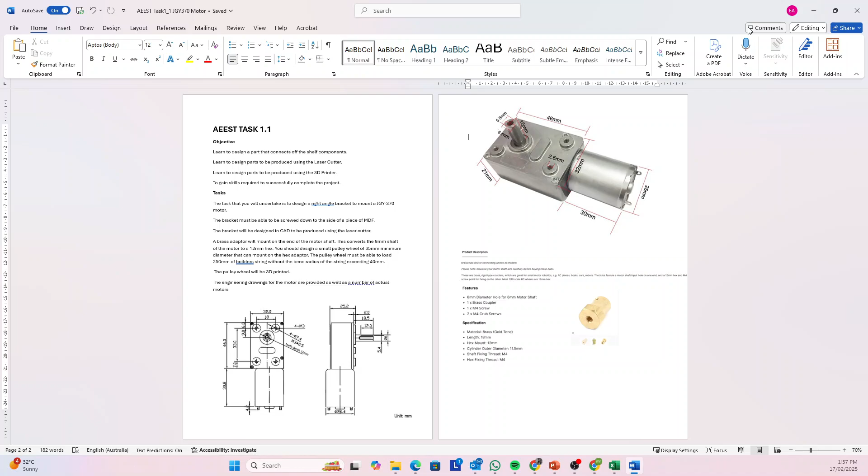So what we're going to do is we're going to start a new design. So we're going to start a new document. I'm going to call it JGY370 demonstration. Going to create.

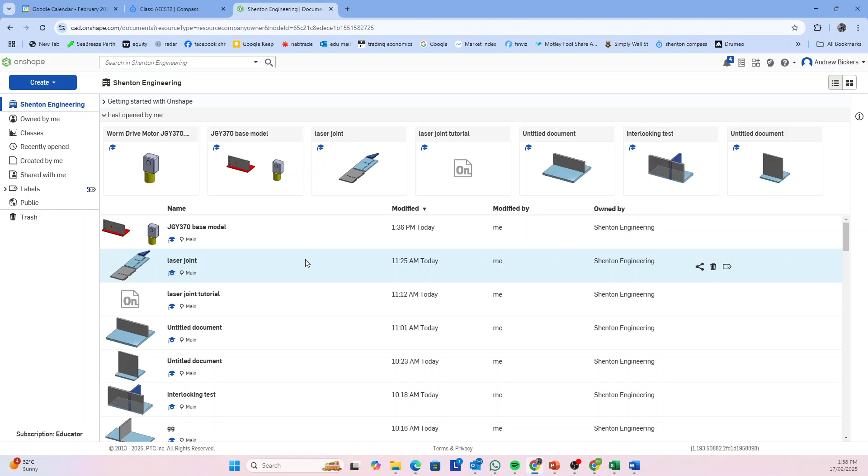Now, while I'm doing this, you're going to have to bear with me because it's quite complicated and there's quite a lot of things in here. So if I stop and start again or have to go back or make mistakes, that's okay. You're going to make plenty of mistakes while you're making it, I'm sure.

Okay, now, first thing we're going to do is we're going to import a model, a previously prepared model of the motor so we can make sure that everything fits. So we're going to add a new tab here. That could be a part studio or an assembly, but we're going to choose import. And then you're going to go to wherever you're storing the stuff. This

design will be in the learning task. You'll just download it. This is the file. It's called Worm Drive Motor JGY370 exported SLDPRT. SLDPRT is a SolidWorks file.

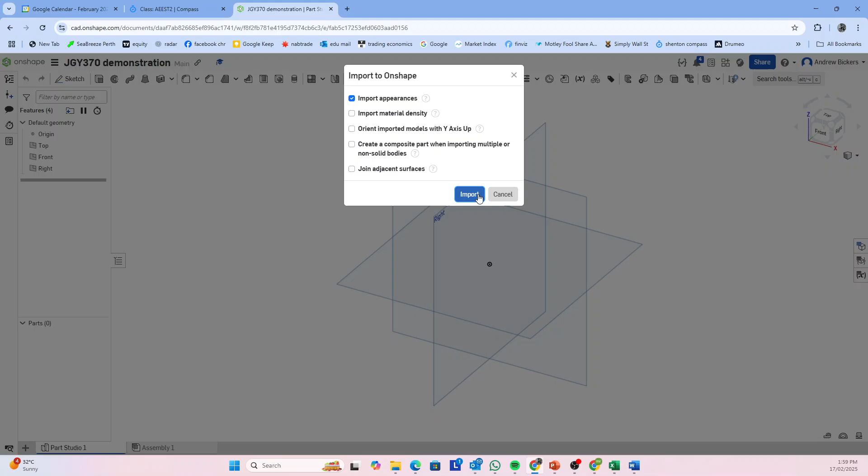All right, so this is quite good. It imports all the appearance and everything from the SolidWorks file. SolidWorks is another CAD program you might possibly use if you do engineering at university.

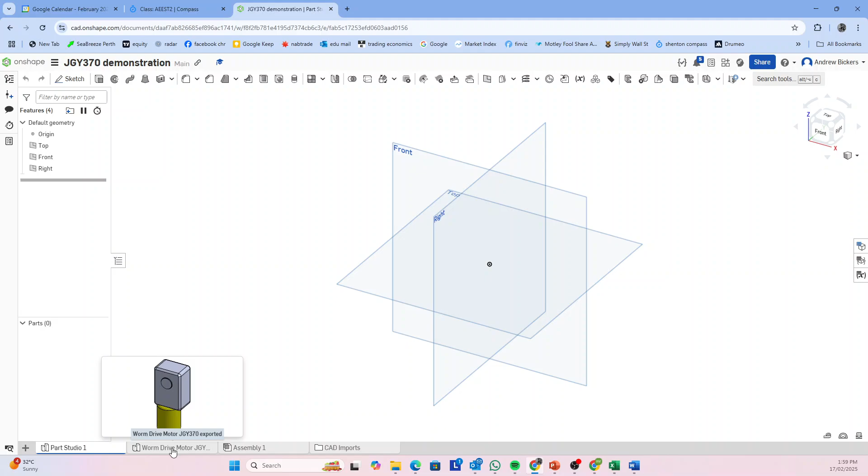Okay, so now we can close this window. We can see a new window has appeared for CAD imports. That's because we've imported that from CAD. But here is the actual part studio. See, it's got the symbol for a part studio here with the actual motor in.

So that's very useful because I just found this off the internet. I just searched for it and downloaded the 3D model for it. That's very handy because we can use this in our design to make sure everything fits.

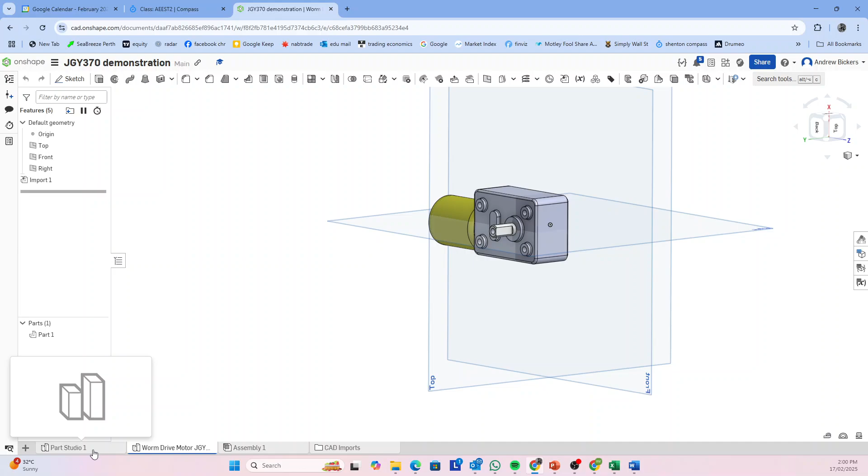Okay, now we go back to our original part studio. Also note that I've got my laser joint and auto layout already installed here. Now I'm going to make a sketch. Like I say, the idea is for you to get the dimensions and design this yourself. I'm just giving you an idea of how to do it here.

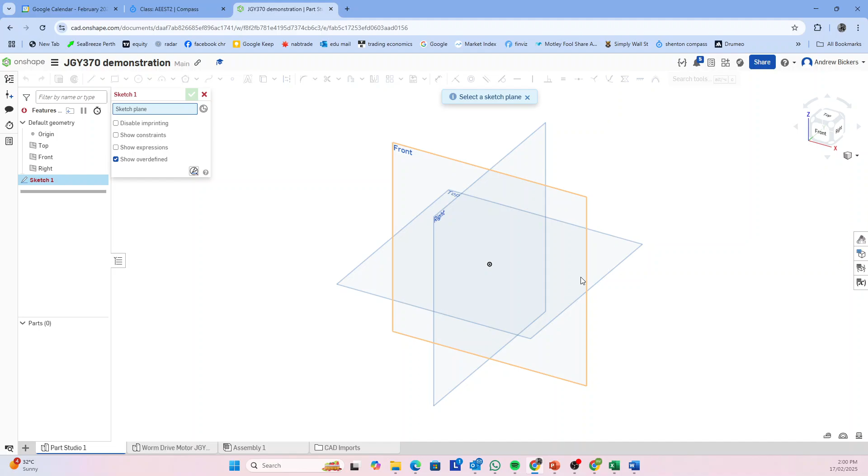So I'm going to create a sketch. I'm going to put it on the top plane here. Start a rectangle. I'll make this dimension here. Might make it 90. Enter, and I'll make that one 60. Enter. Okay, dimensions are on there, so it's all black, so that's good. Go like that. Turn that off.

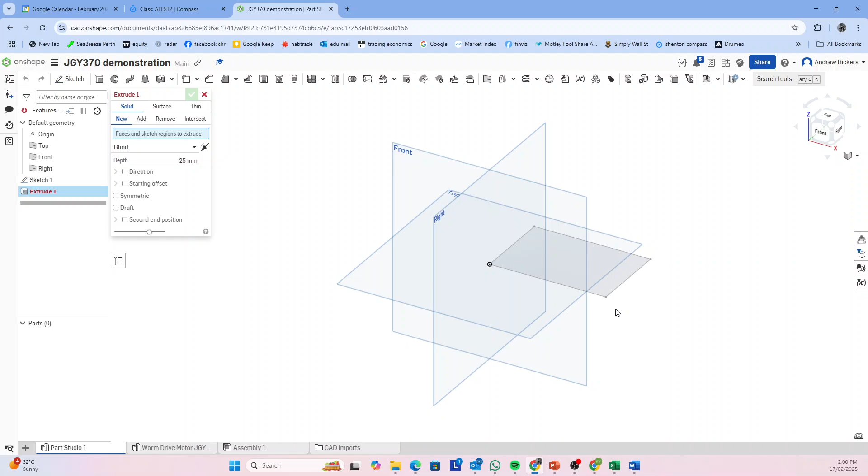Now I'm going to extrude that by 3 millimeters because the material we're going to be using is 3 millimeters thick. All right, and then just like when you went through, oh, I must have not accepted that. Let's accept that again. So 3 millimeters. And then obviously it's important you click that button before you do anything.

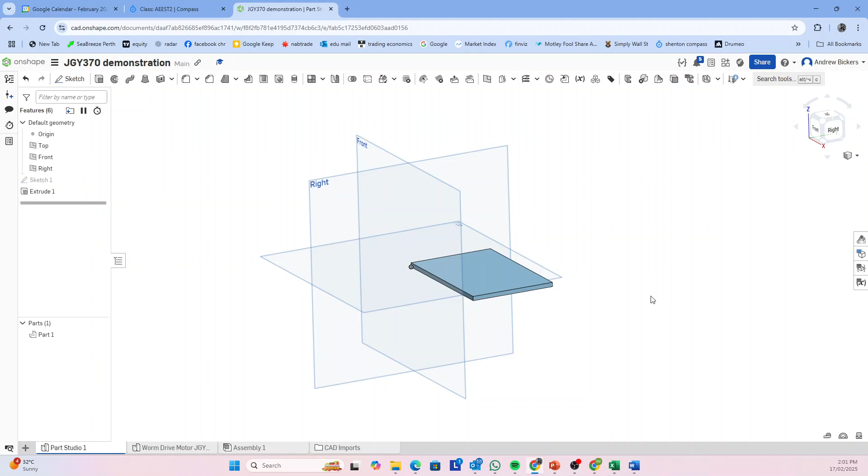Just like we're going to make this a finger jointed structure. All right, so if we're going to make it a finger jointed structure using the laser joint, you have to have done the laser joint tutorial first, otherwise you might get a bit confused. We have to make our parts overlap. So when I make my upright part that the motor is going to mount on, we're going to make a right angle bracket now.

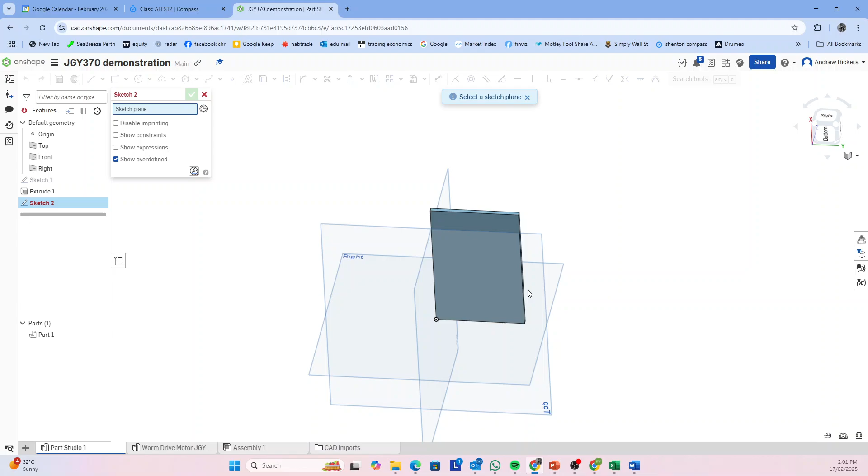I'm going to hit sketch, and I'm going to sketch on the bottom of this. Okay, here I'm going to grab my corner rectangle. You see how it's snapped to the extents of the original rectangle, the original sketch.

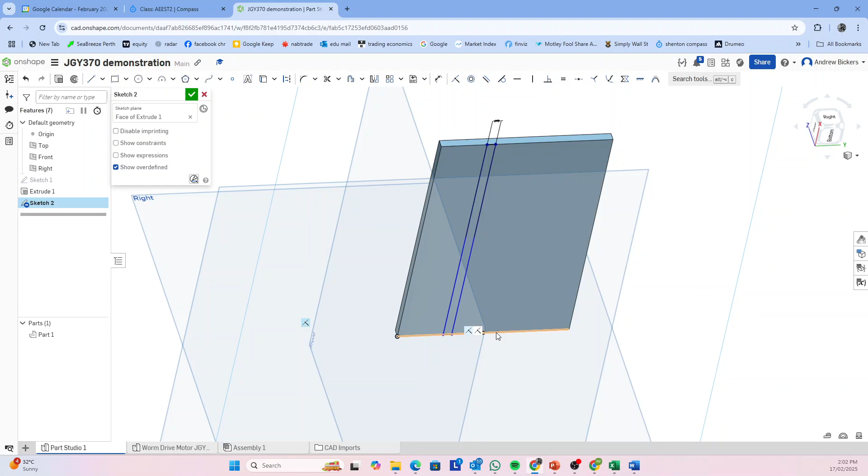Now I'm going to make that 3, enter, and then escape, and then escape out. Yes, escape out, because I don't want to give this line a dimension because it already knows it's snapped to here. So if I give it a dimension, it's going to get confused and be over constrained.

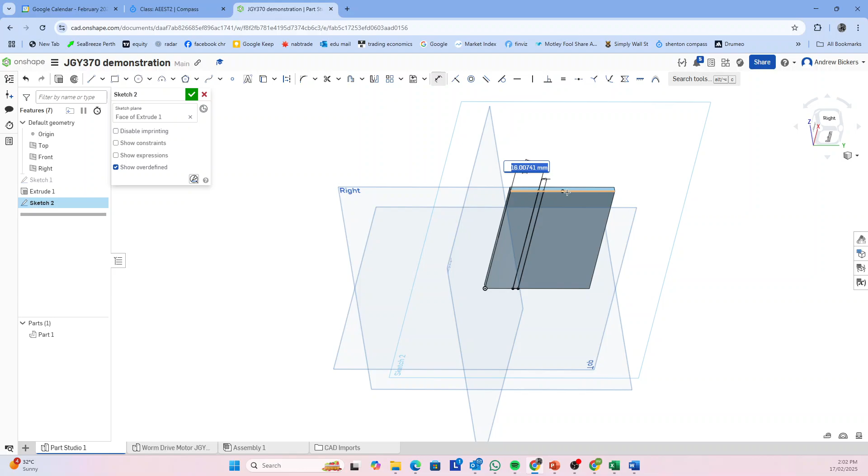So I've got 3 millimeters here though, but the lines are still blue. It's because they don't know how far from the edge they're meant to be. So I'm going to go in here and I'm going to dimension them from the edge by, let's say, 15 millimeters. Okay, so now

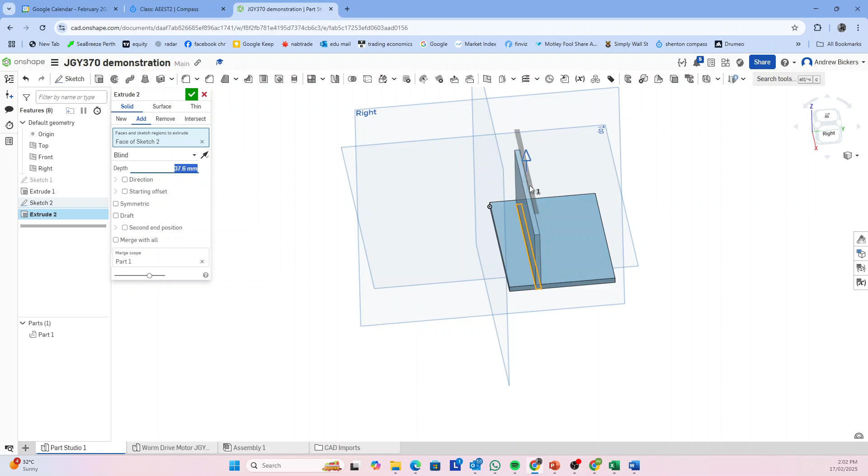I'll finish my sketch, and then I'll be able to extrude up by clicking on this part, extrude up. Now the thickness, I want it 40 millimeters high, but the thickness of the material is 3 millimeters, so I'm going to make that 43.

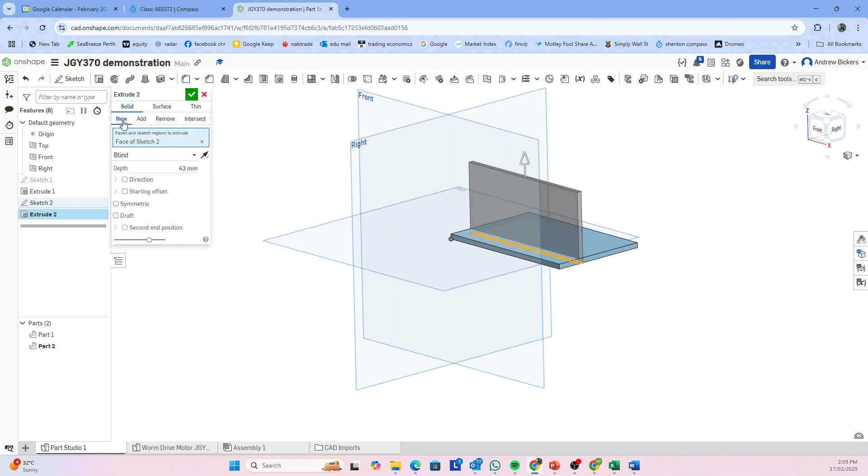Now that's not very helpful because it's all one part, you see? They're all the same color, it's all one part. We can't do our laser jointing if it's all one part, and we can't laser cut a shape like this either. So what we're going to do is go back into the extrude and make it new. In my extrusion I actually made a new part, and you can see there's two intersecting parts there. Now that's quite good.

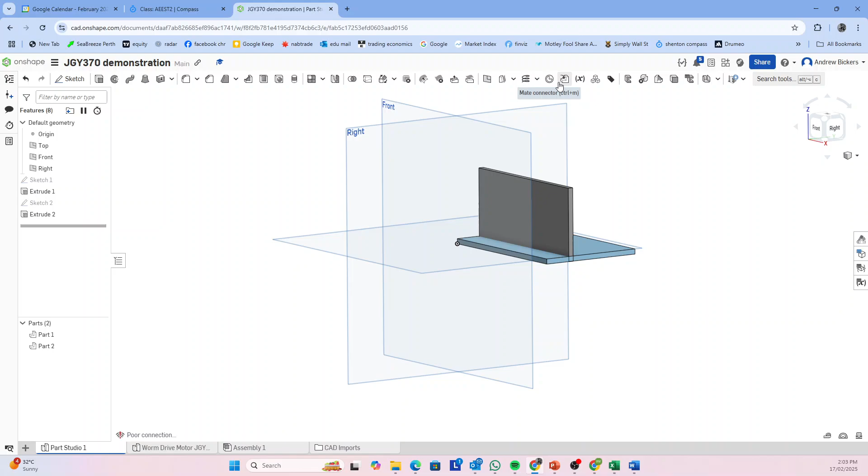So let's bring our motor in. The way we do that is we use the derived tool. Derived just means it comes from somewhere else. So I'm going to hit the derived tool.

It's going to say select the part studio. Whether it's in this document or other documents doesn't matter, you can still drag that part in from there. So I'm going to hit here. Now it's showing me where it's going to come, and I'm just going to put it in there, and we'll sort it out in a minute where it goes to.

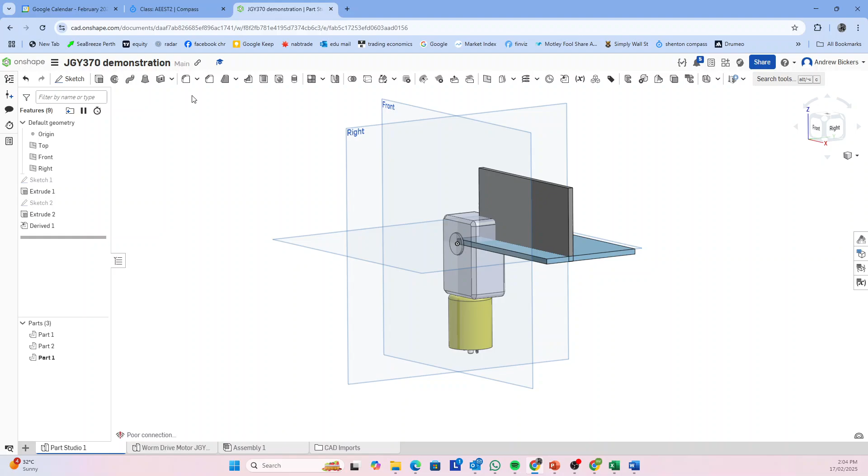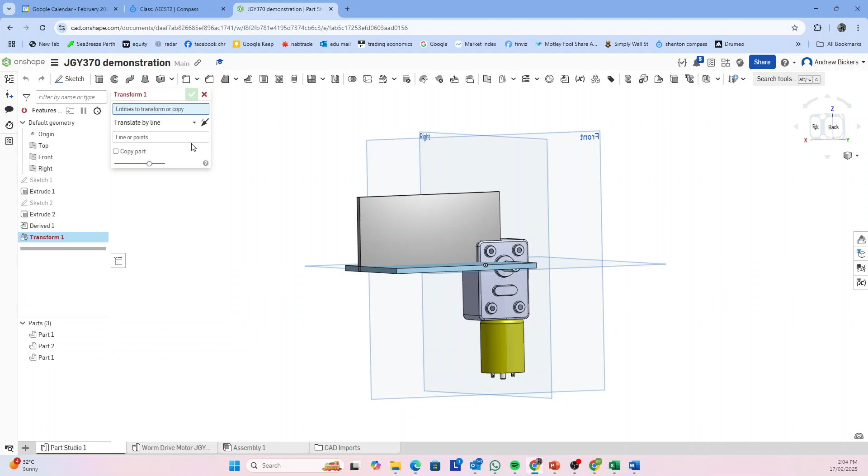Now we're going to move it exactly onto here. But first I'm going to get it just in the right orientation - I always find it's easier just to do that. So I'm going to go to the transform tool, which is this one. Click on the transform tool, and say rotate. I'm going to click on this part - see, now it's got part 1 here. That's part 1, and you've got to pick an axis.

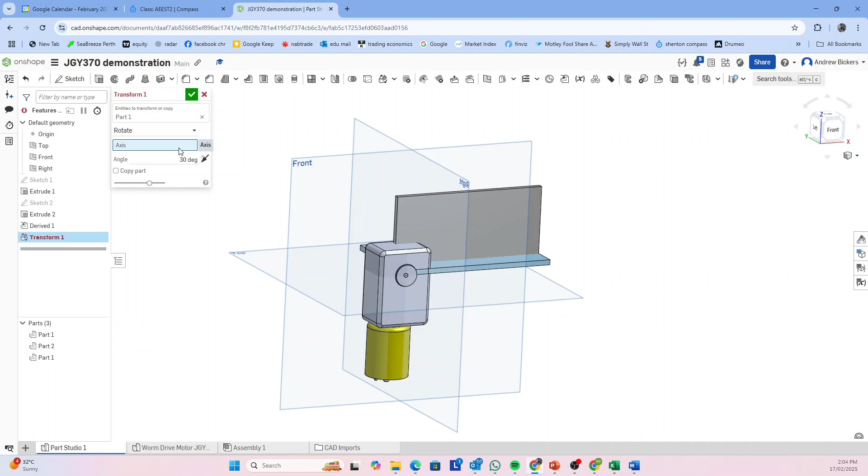So the first thing I want to do is rotate it. I'm going to pick an axis, this axis, and rotate it around here by, well, it's going to be 90 degrees, isn't it? Okay, so now it's rotated like that, and now it's facing the wrong way.

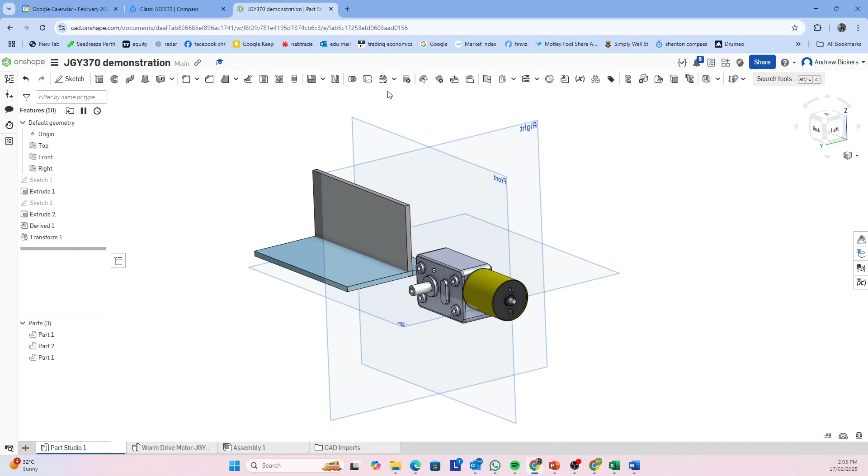I want it to be mounted the other way on the bracket, so I'm going to do another transform. But I've lost the transform tool. Here we go, so I'm going to click on it again.

And I'm going to rotate it again, but this time I'm going to choose this axis, and I'm going to rotate it by 180 degrees. Type it in.

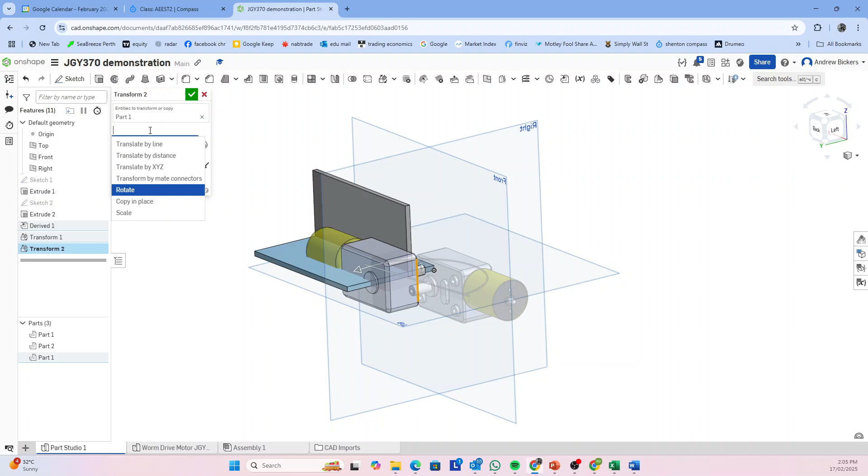Okay, and now it's kind of in an annoying place, so I'm going to translate by X, Y, Z, and then I can drag it out here, and I'm going to go okay. All right, so now it's out the way.

Oh, I need to rotate it again. I want it to face the other way, so let's rotate it again. Transform by rotate, pick the axis - this time it's that axis. 180. Now you can see this is red here, it doesn't know what to do, so we're going to pick out - I'll do that again. Transform this part by rotate by axis by that, and I'll make that 180.

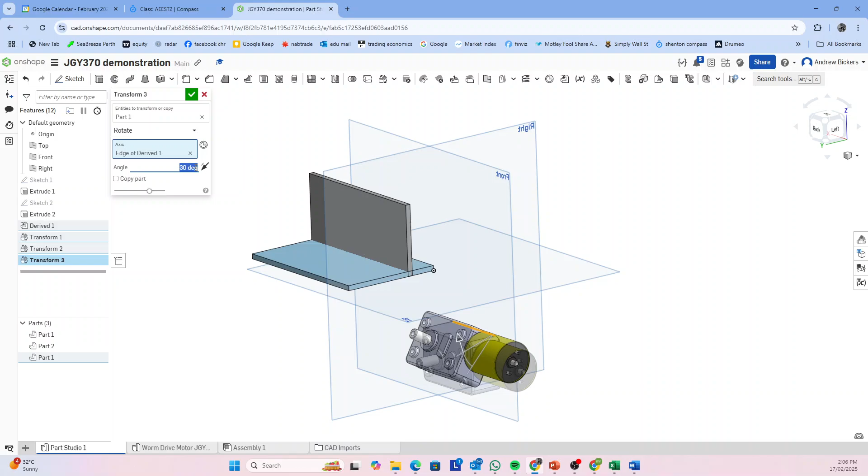All right, so now eventually we're going to line this up with here, but the first thing I need to do is decide where the motor's going to go and how I'm going to line it up. Now obviously if this shaft is going to stick through here, we're going to need a hole, so I'm going to put a hole in there.

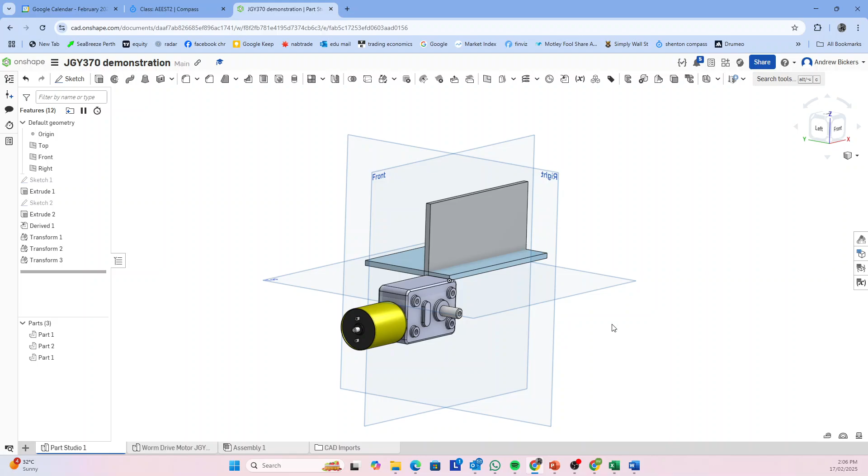So I'll do another sketch on here - a new sketch and put it on here. Go to the front because that's the way we're looking. And now I'm going to put a circle in there. I'm going to make that circle 8 millimeters in diameter. Okay, now it's blue because it doesn't really know where it is.

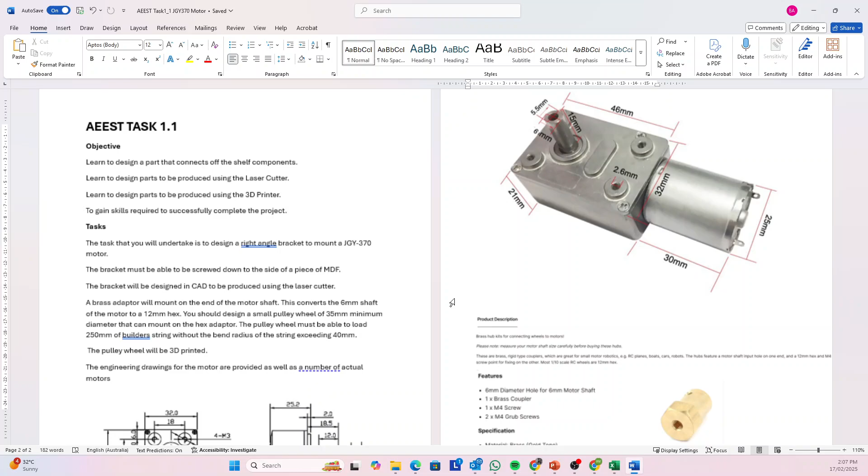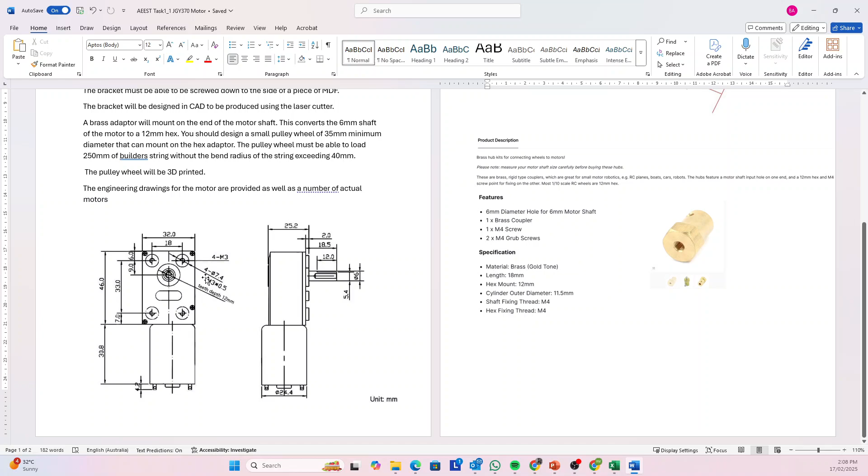Now the motor's going to sit here, so we need to do some calculations with the drawing here. In terms of height, if it's 32 across there and I want a millimeter underneath the motor, then I'm going to need the hole to be off the base. I need it to be 16, 17, 18 millimeters off the base. So I'm going to put in a dimension between here and here, and make that 18.

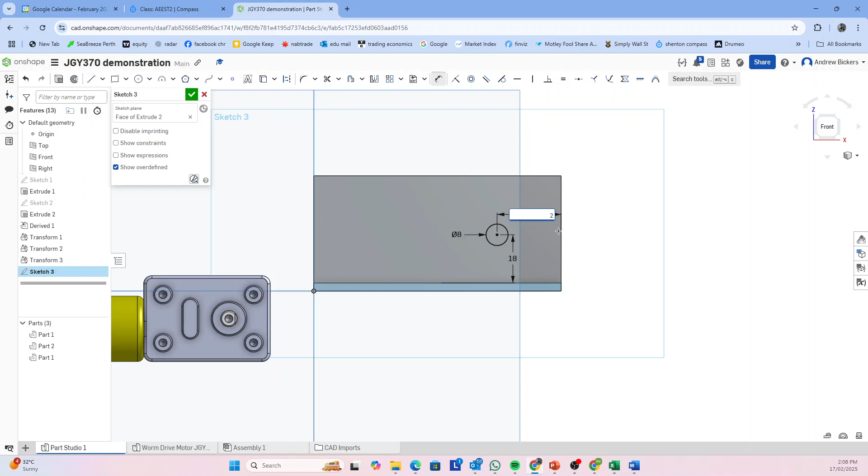And then I actually want it to be about 20 from the end. So I need to put another dimension in because it still doesn't really know where it is. I'll put another dimension in from here - I'm going to make that 20. No, actually, I'm going to make it 25. You'll see why. Like I say, this is up to you to work out the dimensions from the drawing.

Now I've finished my sketch. I'm going to push a hole in here. Make that 3 millimeters.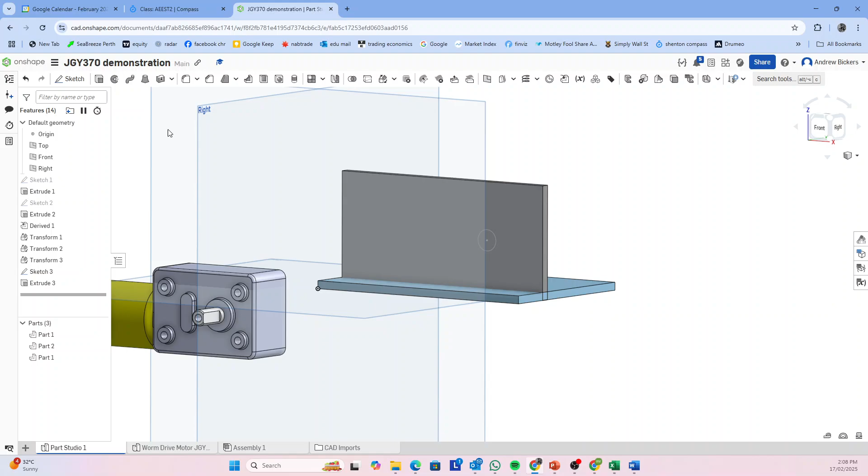What happened there? Put my sketch back on. That didn't seem to work, so let's do this. Ah, didn't hit the remove button, that's why. 3 millimeters - right, now I've got a hole.

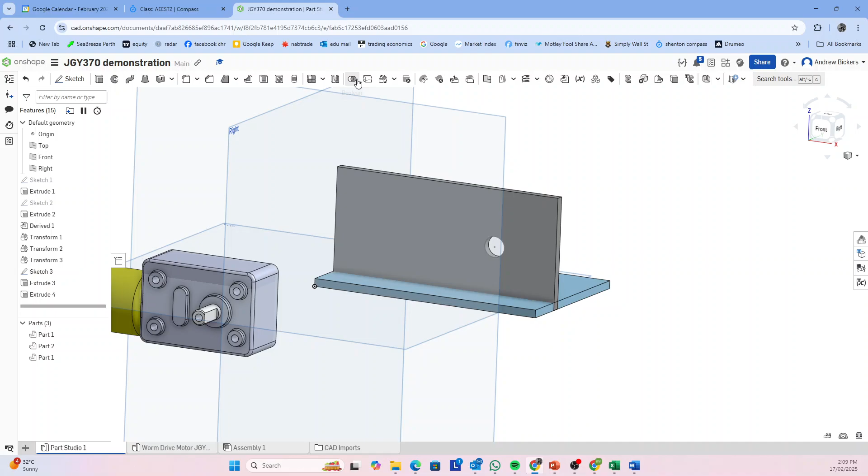Now I want this to stick out of here exactly how it is, okay? Now, how do we do that? There is a very handy tool in the transform. So when we go to transform, click on this.

We did translating by line just now, rotating, translate by XYZ, but we can transform by mate connectors. Now, mate connectors are very interesting - this is actually the symbol for a mate connector, this one here. You can do it through here, but we're going to do it with this. Now, this is the from, and this is the to mate connector.

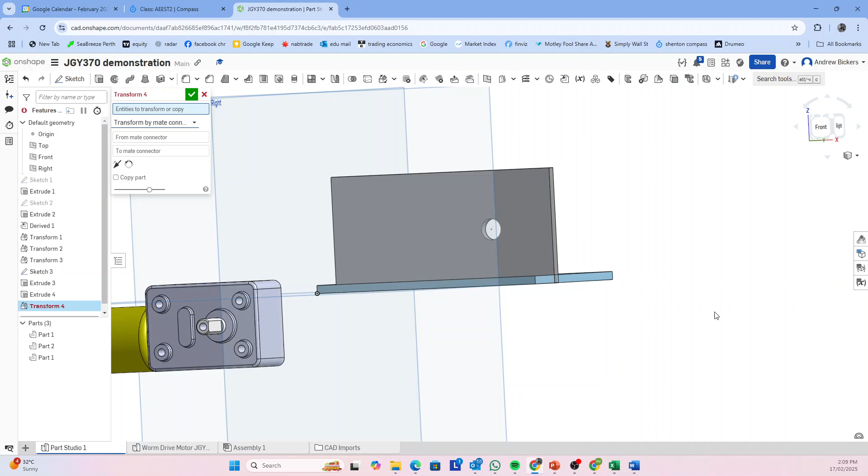So what we have to do is make a mark telling it where we want these things to be transformed. Now this is where it gets a bit hairy because you've got to be very careful about exactly what you want mated. I want this face, so I go the from mate connector. I want this face, not this face, this face, or this face, but this face, the center of this face.

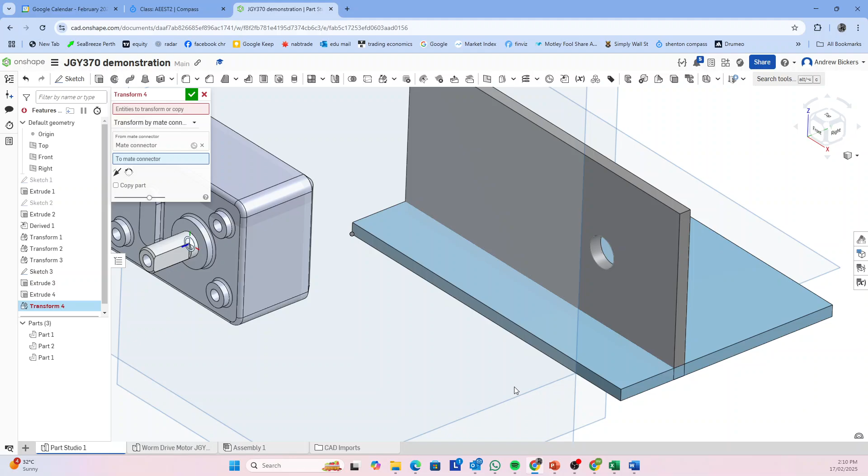You see the little blue line saying it's pointing this way? I want that little blue line, the center of this face, pointing that way, the center of it. That's the from mate connector. Now I want it to go to this hole on this side, not the other side, not that one, this one. So I'm hoping the little blue line's got to point the right way while I'm doing it as well, so sometimes it's hard to get it to do what you want. I don't want to pick the whole tube because it will put it in the middle of the tube then.

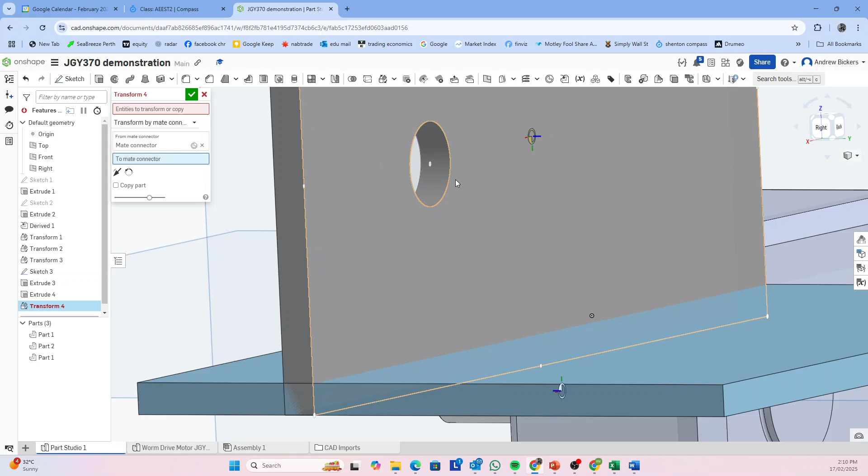How am I going to do this? I had this before. Sometimes it's quite hard to get it to decide on what you want. I want the blue line pointing this way so it's all lined up.

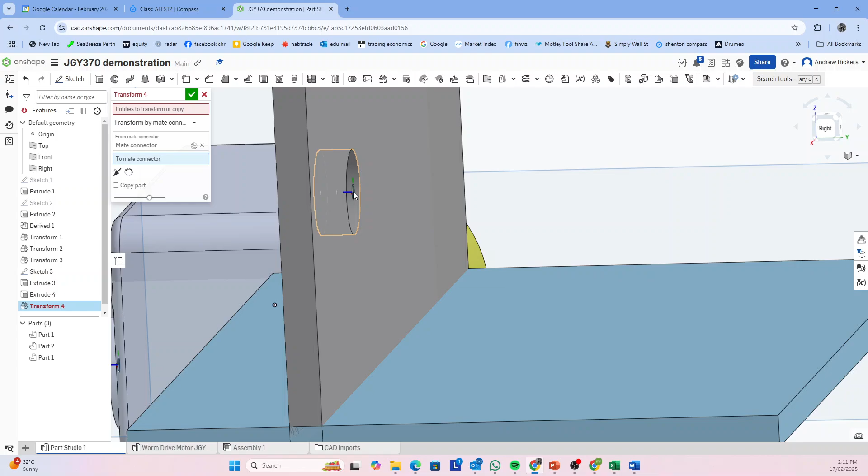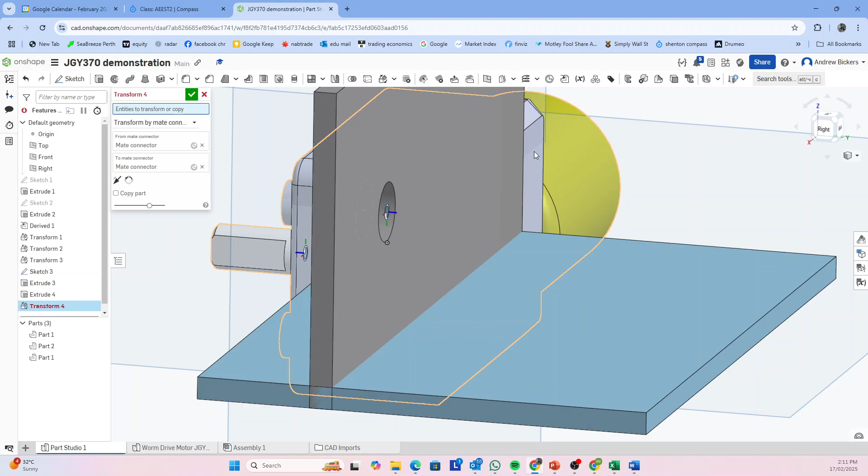So what we can do, there's lots of different ways of doing this. If I did it with the blue line facing that way, and I select the entity to transform, it's on the wrong way, okay? It's the right place, but it's the wrong way round.

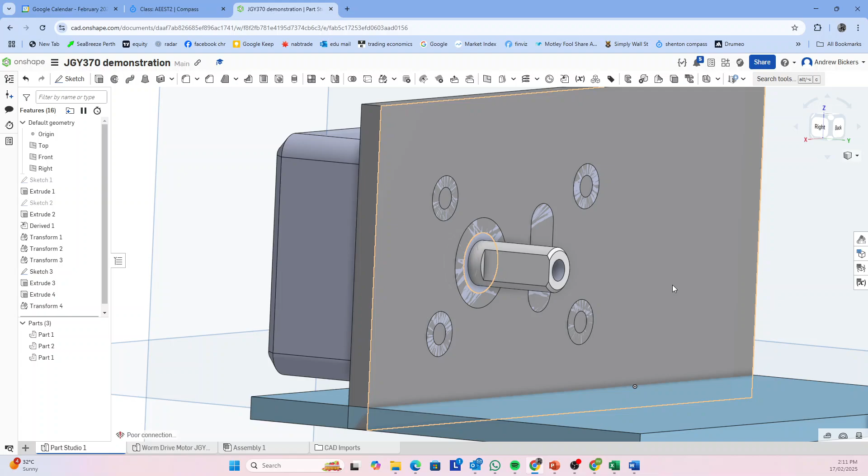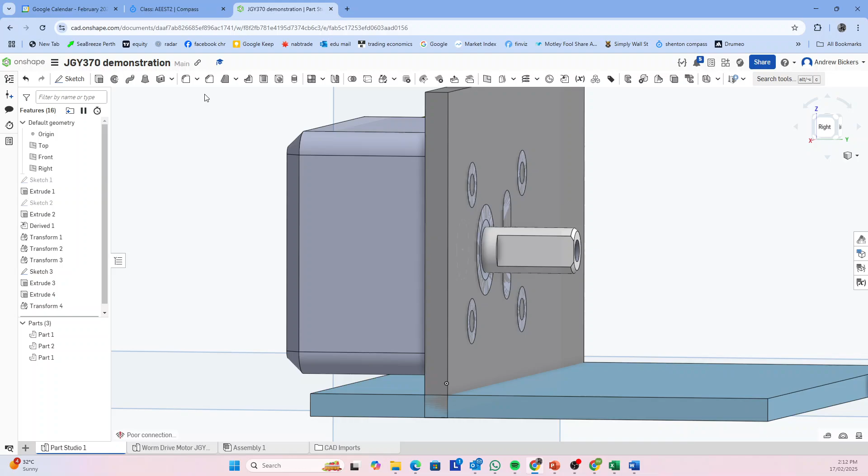So what we could probably do is leave it like that, and then I can rotate it again, or I can try and get it to match up with exactly the right place. So let's open it. The great thing is you can always open the transforms and open all the operations again, and let's try and change the mate connector to where we actually want it to be. Actually, no, let's just delete that and start again. So it'll go back to where it was now.

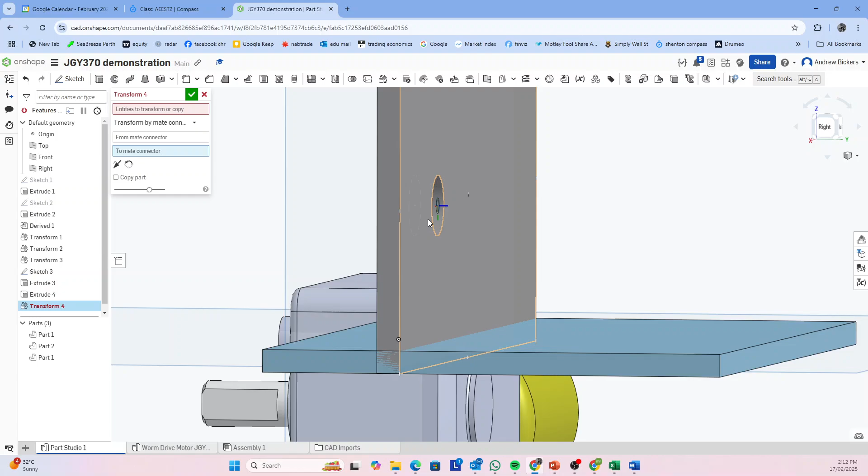Let's try it again. Transform. Transform by mate connectors. So we want to, let's try and pick the right one. Yeah, I don't know why it won't pick exactly what I want here.

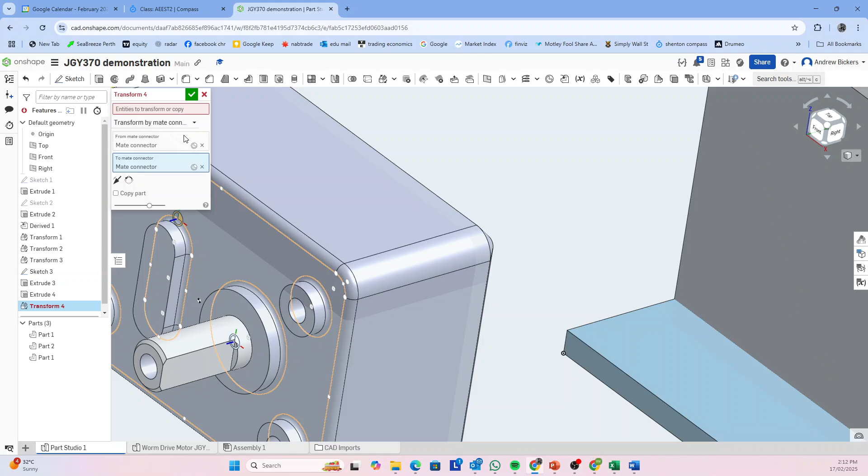Okay, well let's do it to that face and then we can move it back a bit. So now it's going to go on that face, and then we'll go the from mate connector we know is easy to find. That's this one. And I pick the entity. So now it's moved it here, but I need to move it, but it's stuck to the front of this piece of acrylic. I want to move it back.

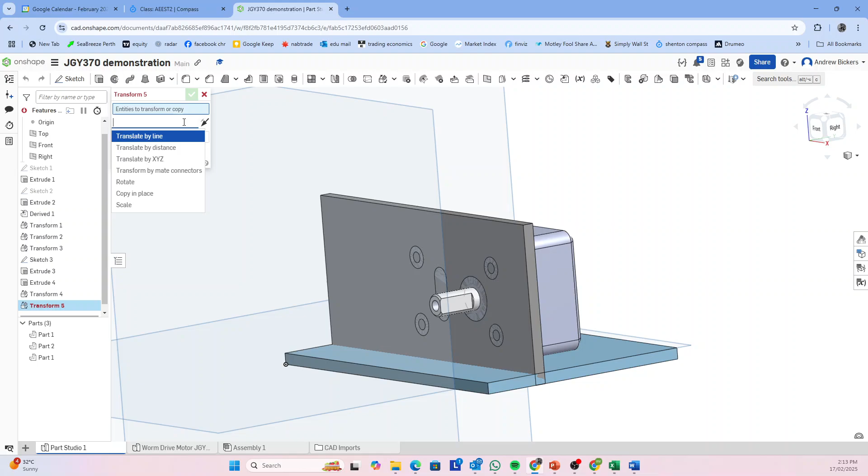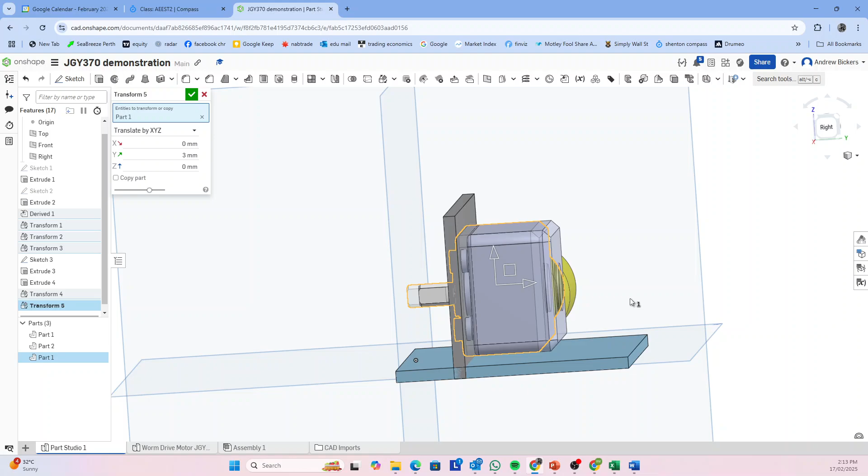So I can just do another transform and do a transform by distance. Pick the direction. Pick the entity. No, actually let's do it with translate by XYZ. Okay, and now I can actually type in here which way I want it to go. So let's make sure we got this the right way. Yes, that's the way. So now it's moved back 3 millimeters. Okay, so now it's exactly stuck to there. The shaft's in the center of the hole that it's designed for, and it's on there.

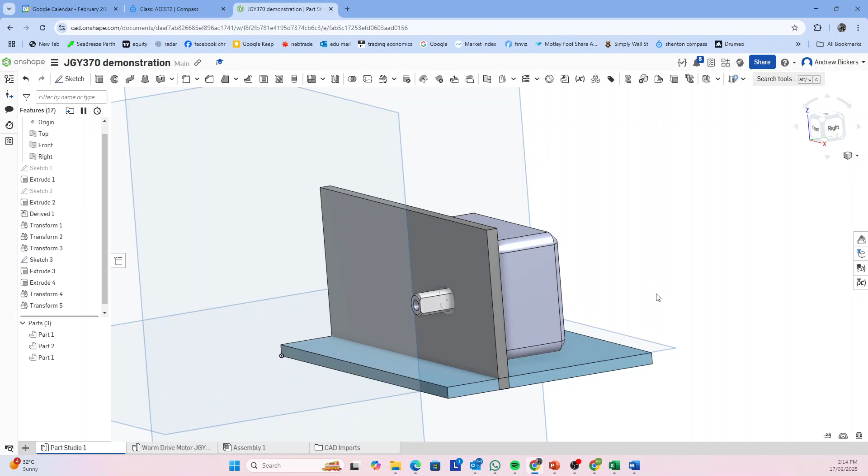Now we're also going to have to make holes through here to match up with this as well. So what's the best way of doing that? Well, let's see if we can do a sketch on here and see where that's. Okay, so I want to do a sketch on the back there, but I can't see the holes. If I turn off part 3, then I can't see where the holes are either.

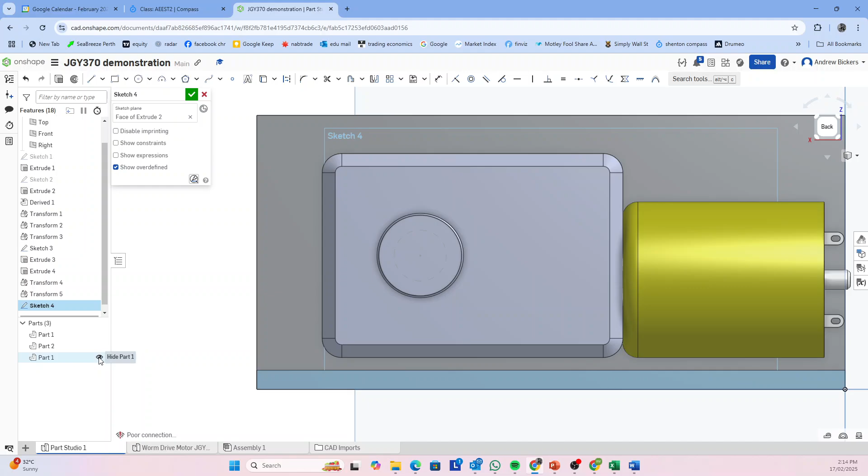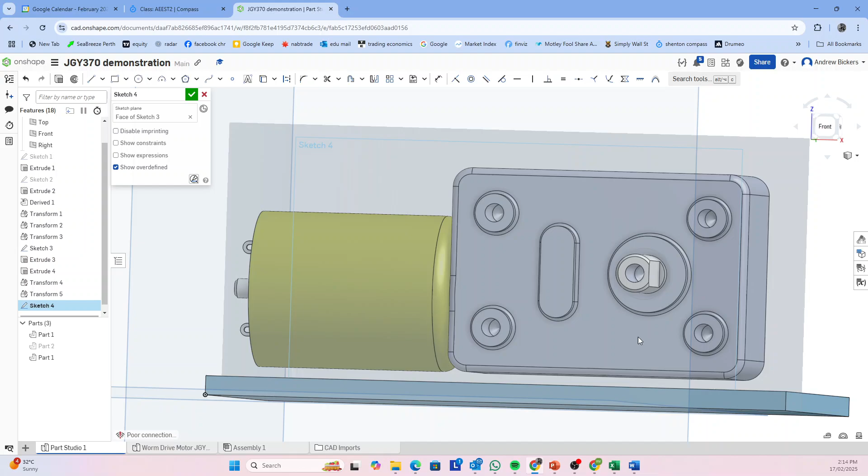If I turn it around like this and turn off part 2, I can see that. So let's see if we'll get rid of where the sketch has got to be, and we'll make the sketch plane on the face of this one. Because now, if I look at the front, I should be able to draw.

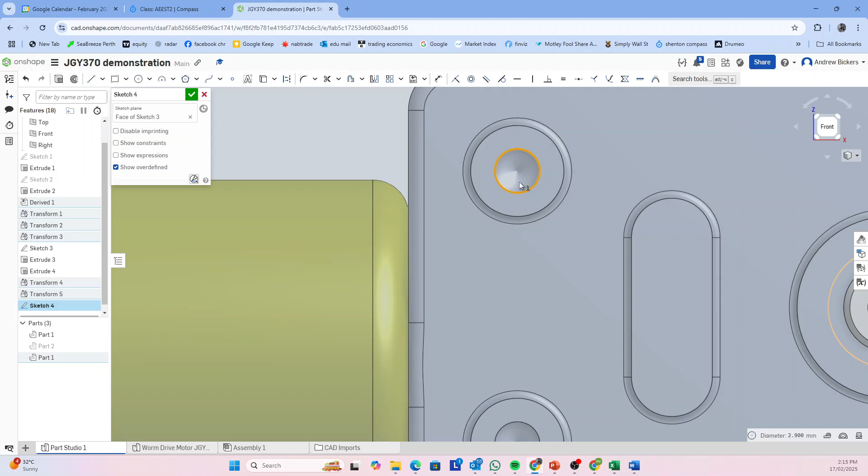No, it's not picking up those parts, is it? Yeah, it's not matching up with those holes exactly. We have to make it so that it should. And now, here we go. No, it's not matching up with those holes, so we'll get rid of that. All right, so we have to make it so that we know exactly where those holes are on here.

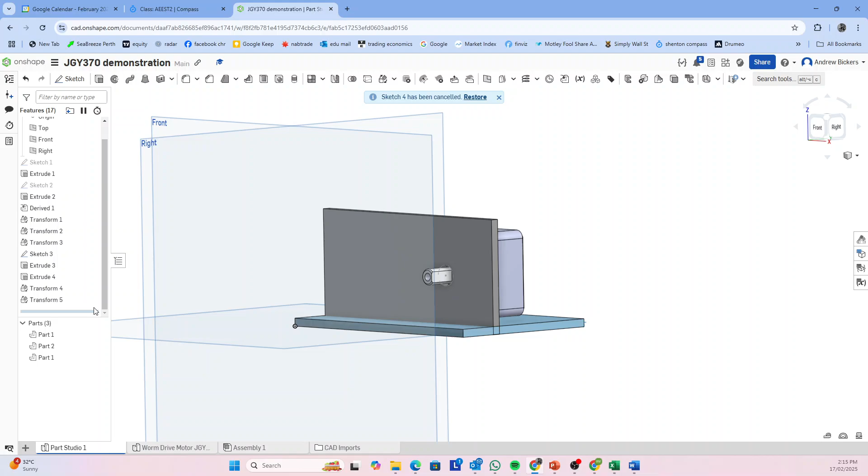Now I'm not quite sure how to do that, but let's have a play. Let's turn off this part. Let's do a new sketch. And hopefully we can sketch. It wants us to select a sketch plane. I actually just wanted to sketch on this part here, and it doesn't seem to want to let me do that.

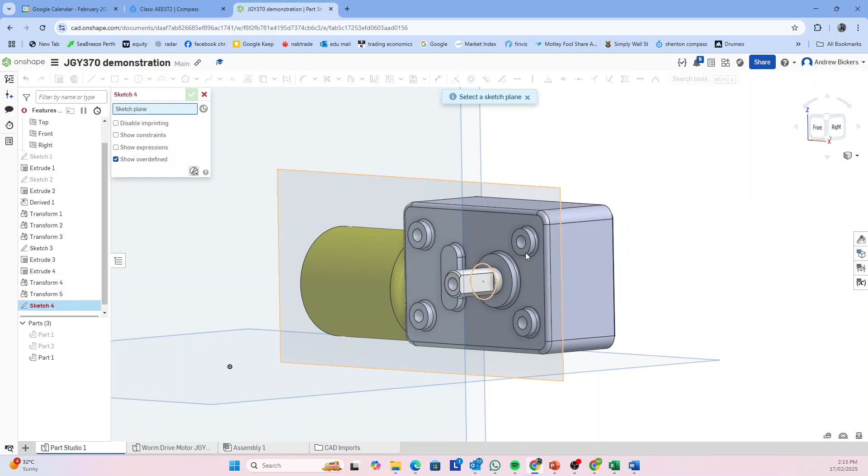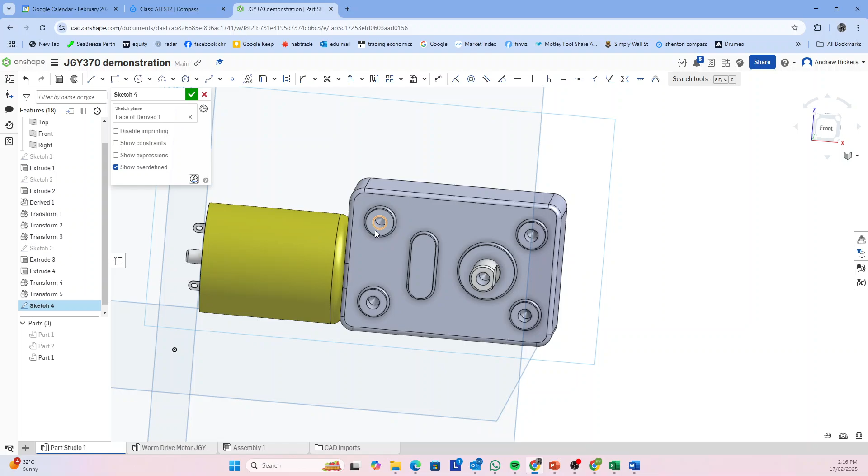Let's turn the sketch off here. All right, so now we should be able to sketch on this plane. So we're sketching on the face of the Derived 1, which is the motor. So if I draw a center point circle now, it's going to let me do it. Although it's not letting me pick the center of these circles. Okay, so how are we going to manage that? It's only letting me pick the outside of them.